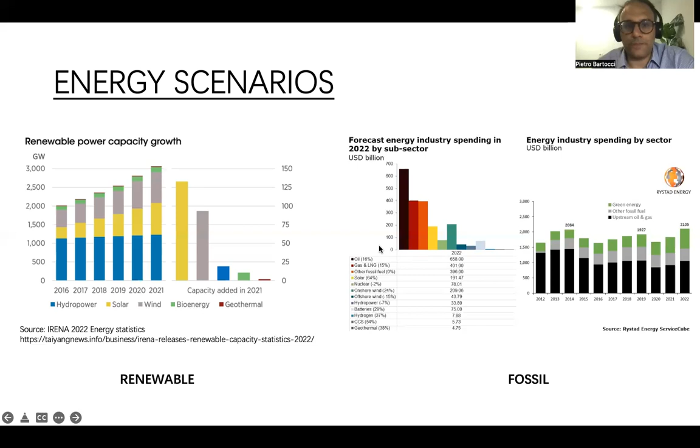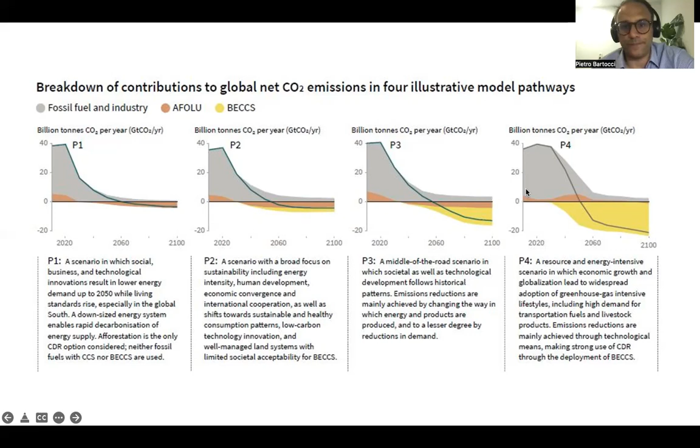So how does bioenergy with carbon capture and storage work? Mainly CO2 is absorbed from the atmosphere through the photosynthesis process, performed by biomass, which could be herbaceous or woody biomass. This biomass could be transformed into energy directly, or previously converted into a biofuel and then transformed into energy in power plants.

We are speaking about thermochemical power plants which combust biomass. The CO2 coming from this combustion, if it is captured and stored underground, could be a negative technology, carbon negative technology, because we actually absorb the CO2 and we store it underground.

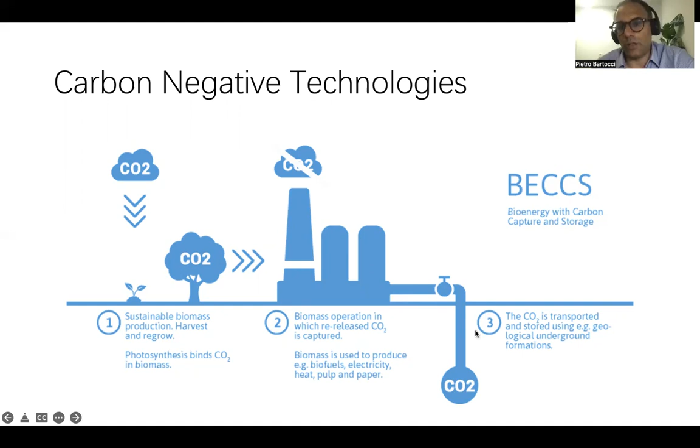My project, which deals with carbon negative emissions gas turbines, started through a previous collaboration between the University of Perugia and Baker Hughes. We see here the results of a paper published in 2021, a study on a new model of gas turbine developed by Baker Hughes in Florence.

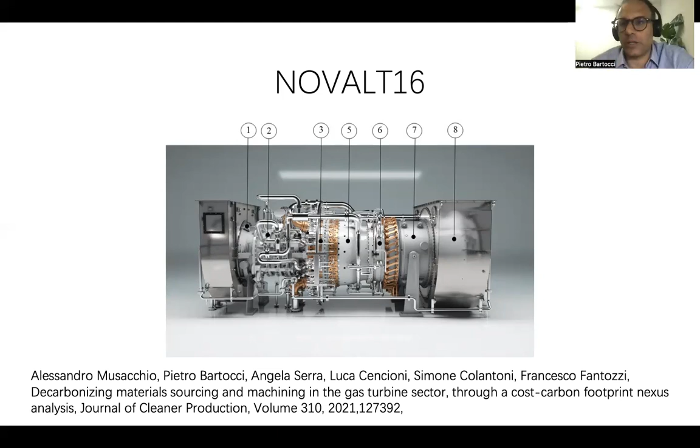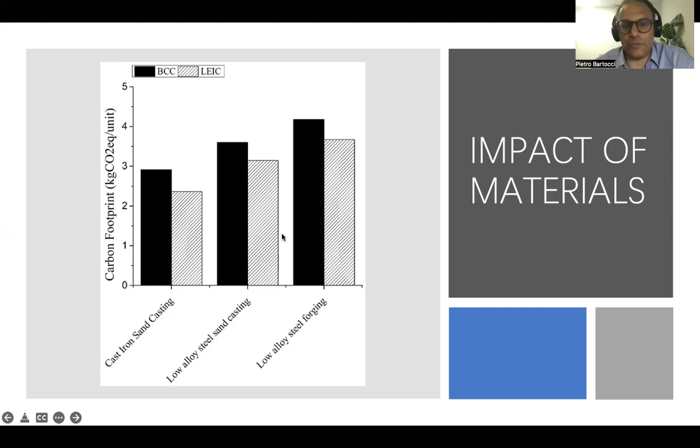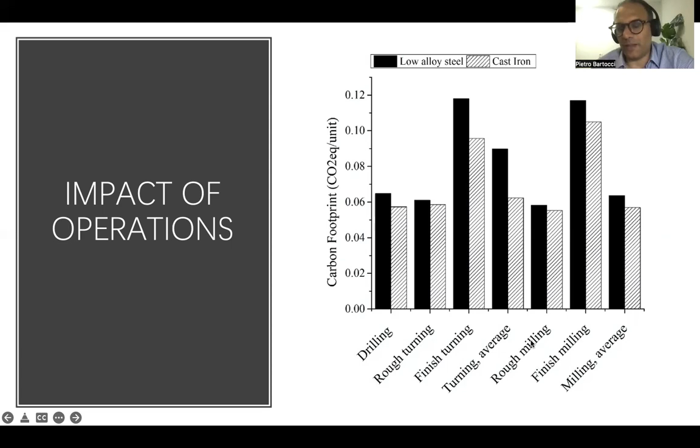We also evaluated, with the same approach mainly based on life cycle impact assessment, the impact of all the operations which are performed in the production company and are necessary to produce the gas turbine.

Finally, we arrived at the analysis of the different impacts of the different components of a gas turbine, in order to perform a design process which could take into account not only economic parameters, but also environmental and social parameters.

This action was preliminary to the project that I am presenting, because life cycle assessment can be a technology which allows us to select the less impactful solutions and approaches. This is followed by, but not yet fully utilized by, the whole oil and gas sector at the moment.

As we know, the most important part related to the impact of a gas turbine is when it combusts fossil fuels. So this is the part where we focus in the next steps of the presentation.

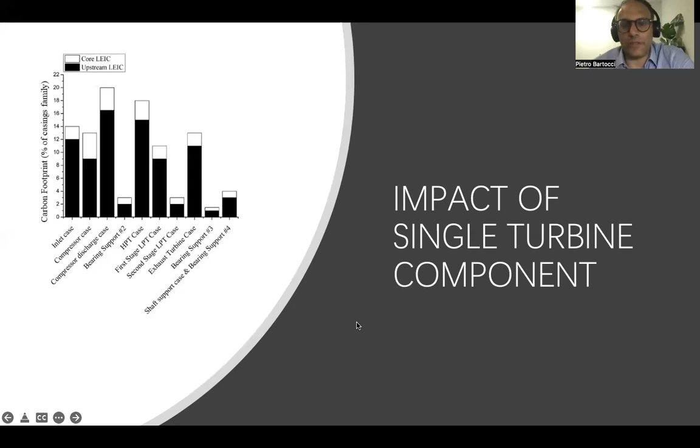So why integrate a chemical looping combustor into gas turbine? Economic and environmental aspects. This is a first study I did

This concept is not new. It has been discussed by the Technical University of Vienna, also by Dr. Wolf and Dr. Yan in a previous paper, and by the Polytechnic University of Milan.

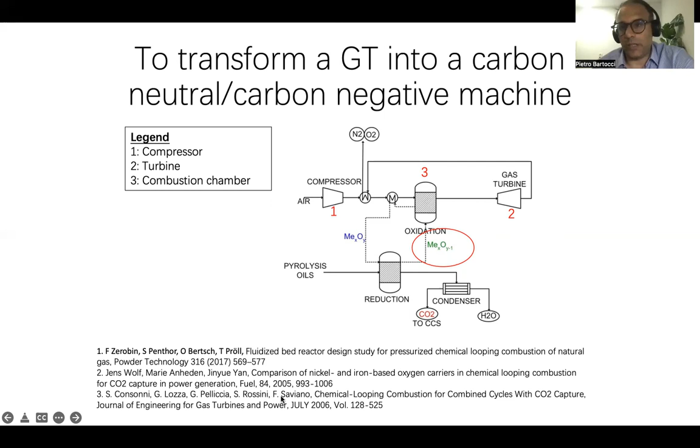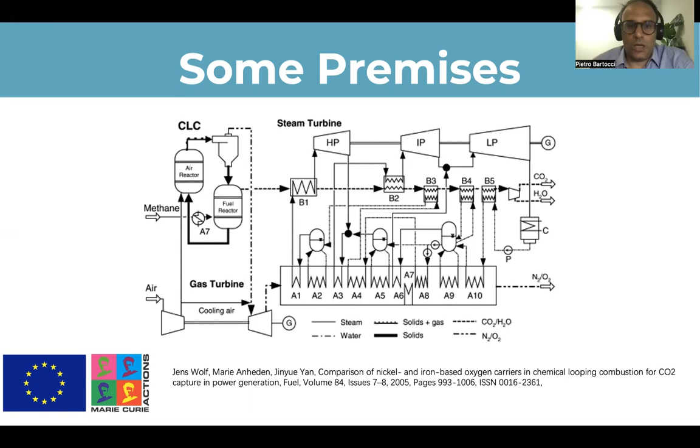Here is an example of the concept plant developed by Dr. Wolf and Dr. Yan. And here is also an example of the plant developed at MIT, which I found interesting to propose here because the conference is hosted at MIT itself.

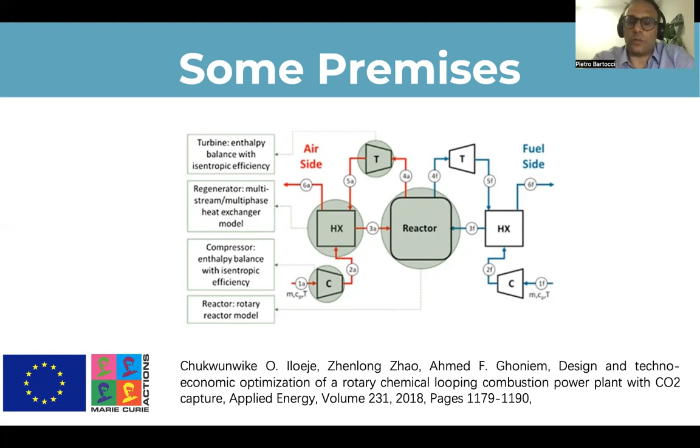And here we see that the peculiarity of this plant is that it's based on a combustor, which is a rotary combustor. So at MIT, they designed a very compact version of a chemical looping plant in which the reduction and oxidation can happen in only one reactor. So this was the importance of their approach.

Why is this work, this process, this project needed? It's needed because even though this process has been already studied and theorized, at least in theory, there are still some barriers which prevent its application at industrial scale, and so its commercialization. The first barriers are that we need efficient oxygen carriers, maybe bimetallic oxygen carriers.

We also have to grant low attrition of the oxygen carrier, and the oxygen carrier must not form dust, because this could be a problem when the dust is not efficiently separated by the cyclone and we find dust in the gas turbine, for example.

The kinetics of the chemical looping when applied at high pressure and high temperature is not well known at the moment. There are few plants, mainly on pilot scale, working with pressurized conditions, and this is a brand new field which needs to be addressed and researched.

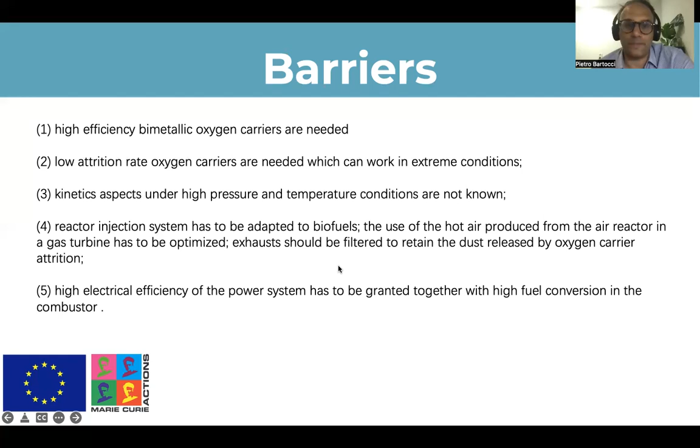So dealing with carbon capture through the chemical looping combustion process, I guess everyone knows the process: combustion where oxygen is provided by metal oxide, not by air.

The advantage is that in the exhaust gases, we don't have nitrogen, which is contained in air, and we don't have oxygen, because only the needed oxygen is liberated by the metal oxide. So we have two streams of water vapor and CO2, and if we condense the water vapor, we can have a pure stream of CO2 which can be captured at very low cost.

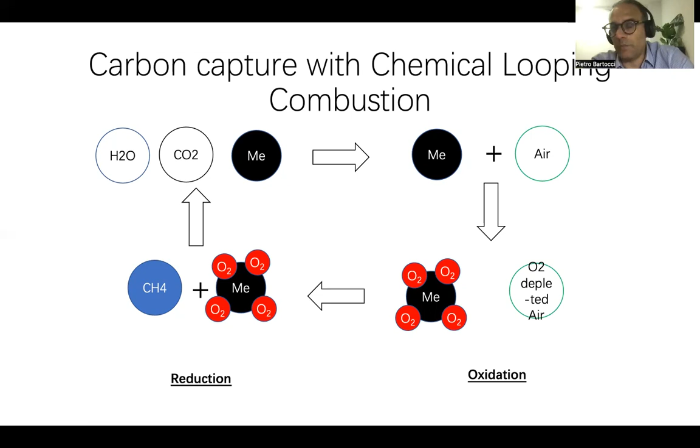We have done a feasibility study which wanted to create an energy scenario for Italy in 2030 and try to see what happens if we substitute the combustor of the combined cycles, which are now burning natural gas in Italy, with a chemical looping combustor.

The costs of the chemical looping combustors and everything are taken from literature. Obviously, this is a study which wants to promote this technology, but we also have to consider that the technology should still be optimized before joining the market and having wide application.

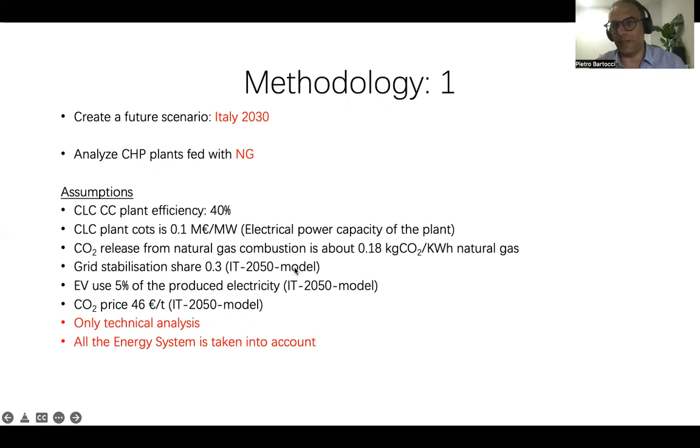The data about the Italian energy system are taken from the National Energy Strategy and the National Integrated Plan for Energy, using the Times Italy model, a version of the MARKAL-TIMES model used by the International Energy Agency to perform energy scenarios. All these data from different energy planning documents in Italy have been inserted into the EnergyPLAN software developed by Aalborg University in Denmark.

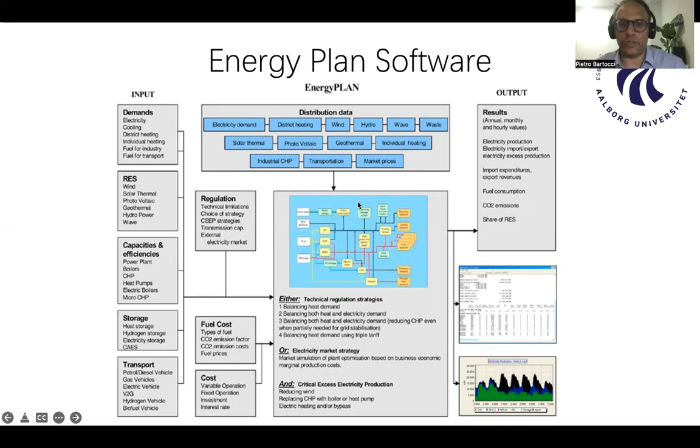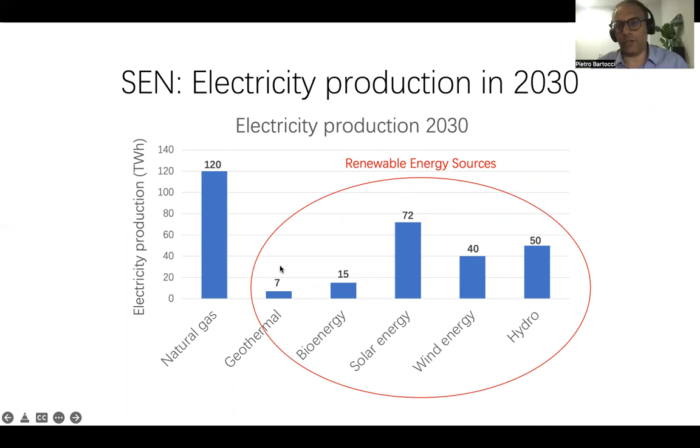We have recreated the energy scenario for Italy based on the targets indicated in the energy strategies for 2030. We see that the contribution of natural gas is still very important, and we assume that the natural gas combined cycle plants present in Italy will not be stranded assets, so they will continue to work and repay their investment.

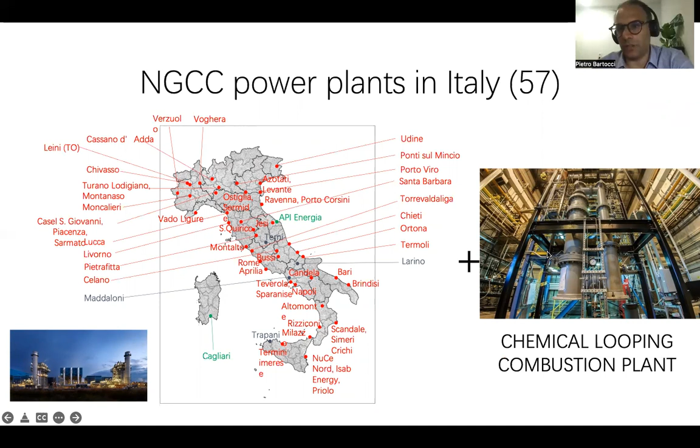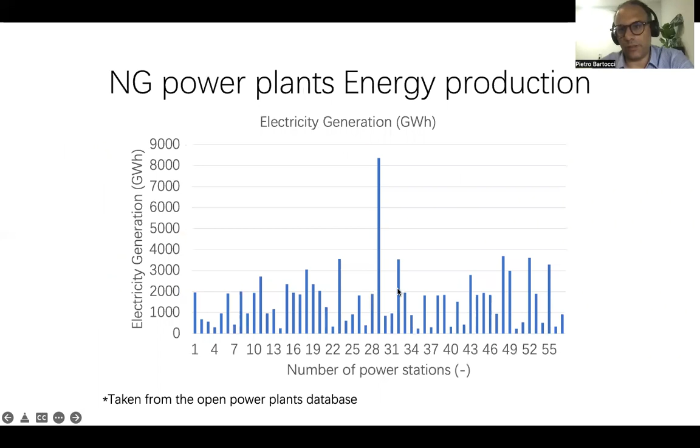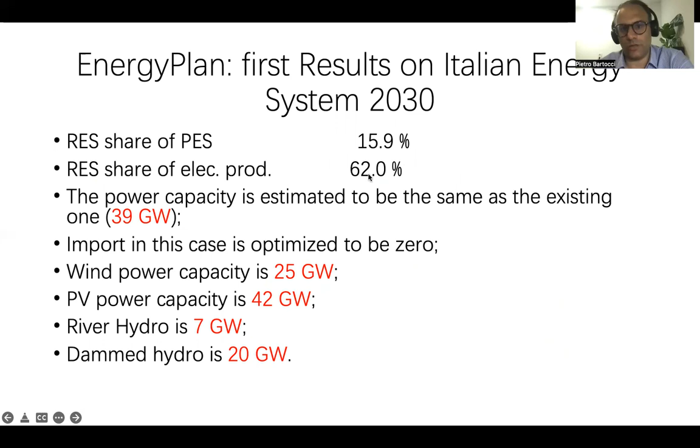What we want to do is substitute the combustion chamber with a chemical looping plant, which is the topic of my project. These are the capacities of the combined cycles we have in Italy, and this is the electricity production. We see that our final scenario introduces a penetration of renewable energy around 62%.

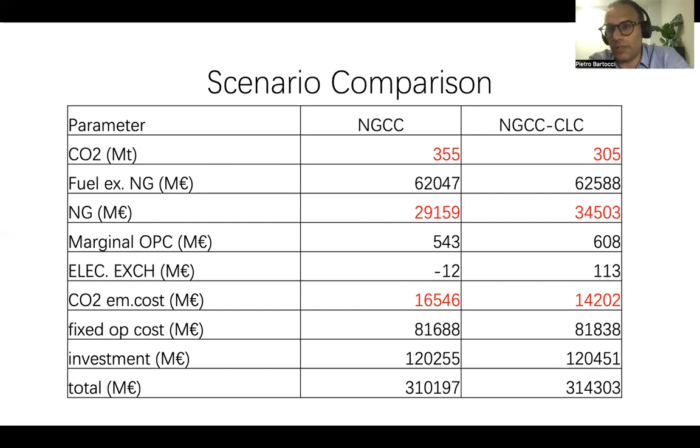We see here the benefits in terms of CO2 reduction and the costs of the total system. If we compare the costs of the new system, on the right, where we introduce chemical looping combustion, with the business as usual scenario proposed on the left, we see that the investment needed to upgrade the plants is not so huge.

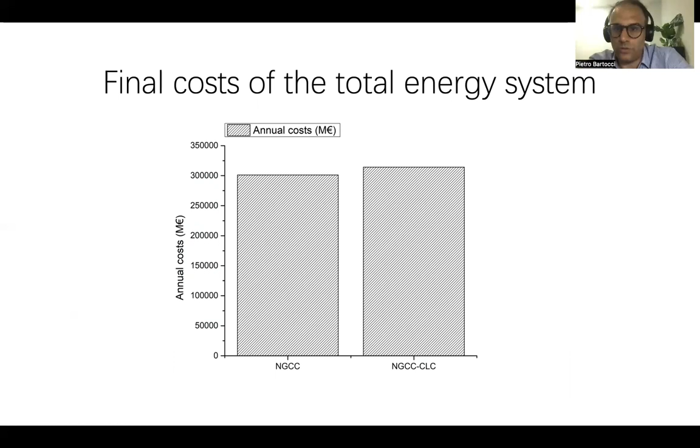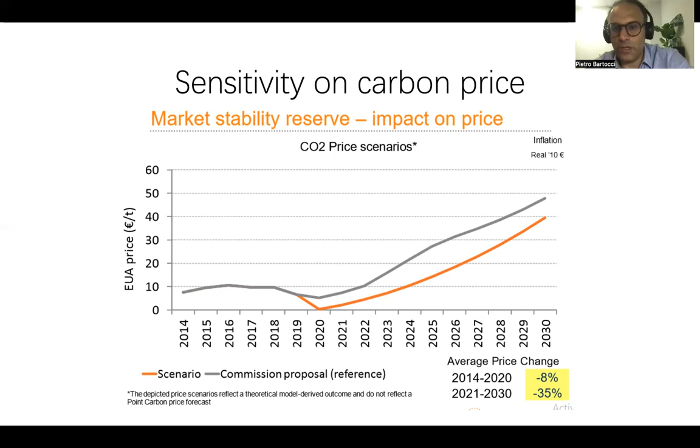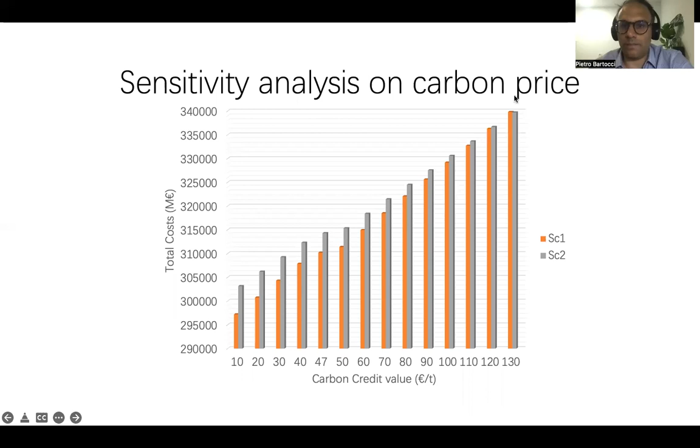The investment and operating costs also depend on the carbon credits that we have, and these carbon credits are much higher compared to the estimates we had in 2018. So if the carbon credit reaches a threshold of 130 euros per ton, we can say that all the investment and costs necessary to run this system could be balanced by the carbon credit, equaling the business as usual scenario.

So from these premises derives my project, which uses chemical looping combustion not only for CO2 capture, but also for carbon negative technologies. What we want to do is use biofuels in this technology.

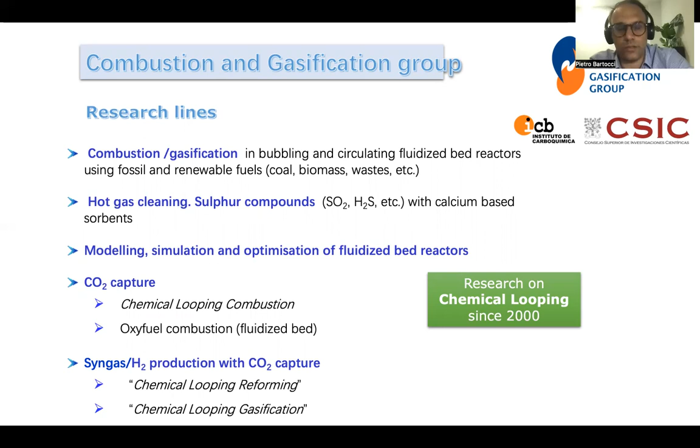To study how to develop such a combustor and this technology, I was hosted as a Marie Curie Fellow at the Instituto de Carboquímica in Zaragoza, Spain, by the group of combustion and gasification, which has several research lines, and facilities to prepare oxygen carriers, test them in pilot plants, and then scale and optimize the entire combustor.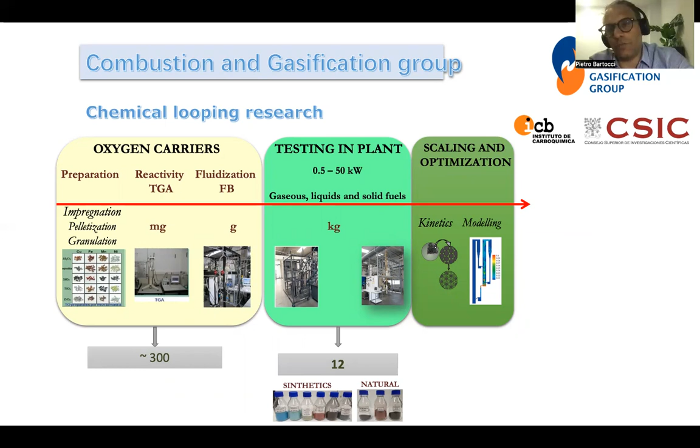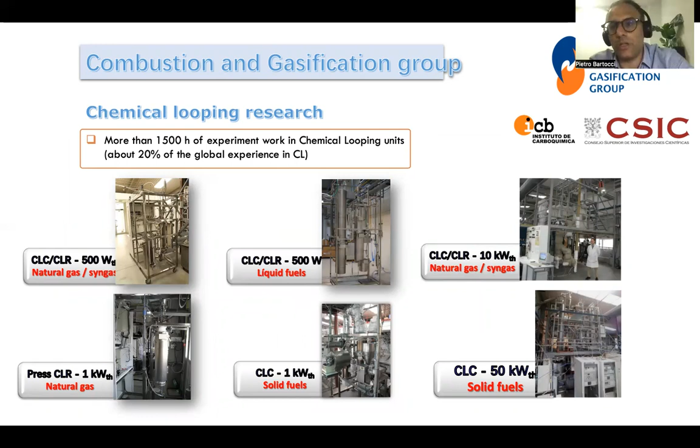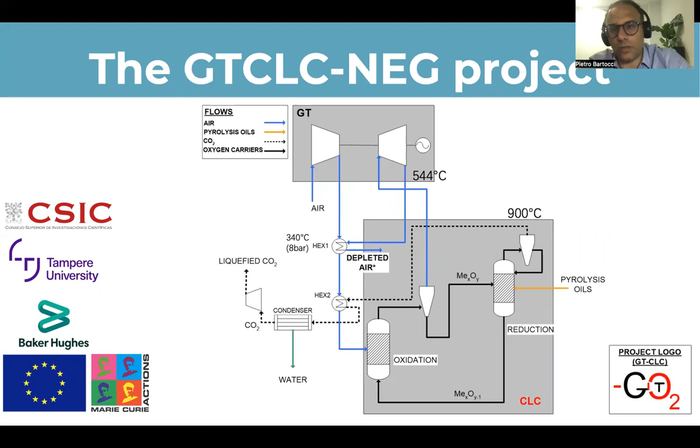Here are batch plants which can work with gaseous, solid, and liquid fuels, and also continuous plants. We have already discussed the idea of coupling chemical looping with the gas turbine, so I will not speak about it again.

I will introduce the project, which is mainly based on the preparation of oxygen carrier in batch tests, modeling of particle, reactor, and the whole plant, and then continuous pilot tests and reactor design, with guidelines to help build our first prototype, for example.

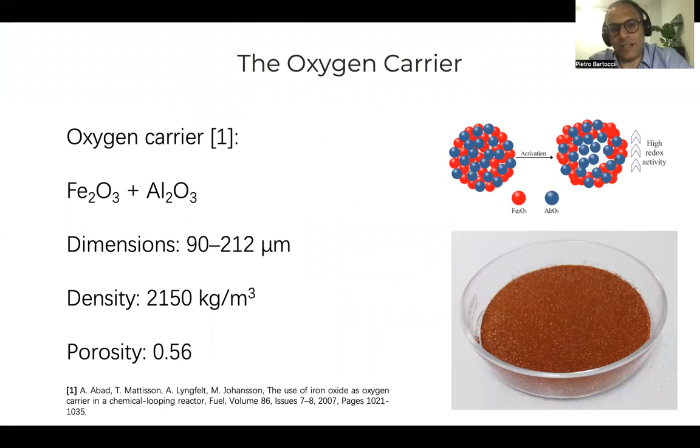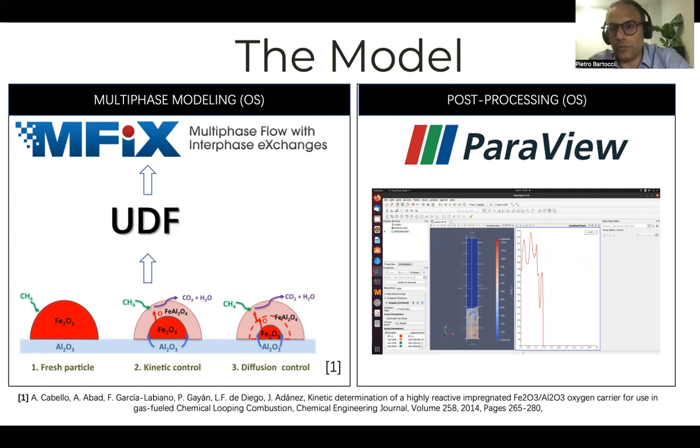These are the results of the modeling part, which have already been published. It's a model for a batch reactor, done in the MFIX software, developed by the National Energy Technology Laboratory, part of the DOE in the US. The results of the model are based on kinetics, with kinetic parameters derived at the institute where I'm working now in Spain, and then visualization of the results.

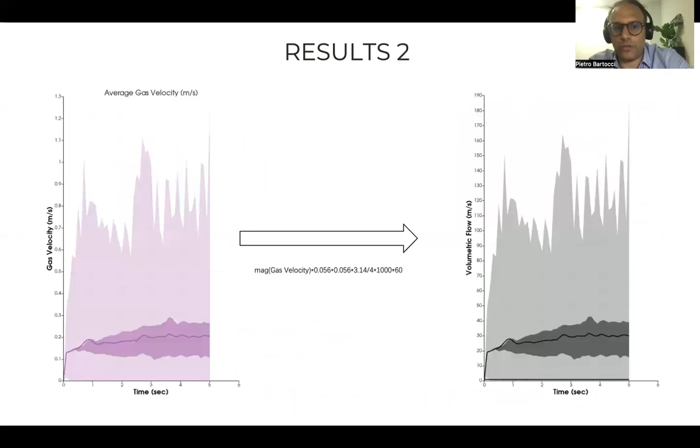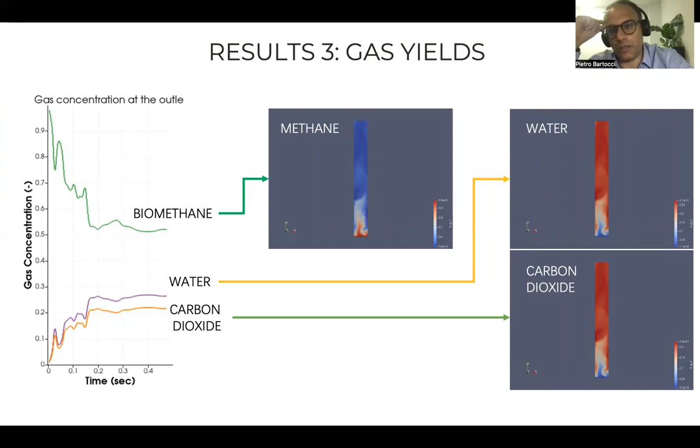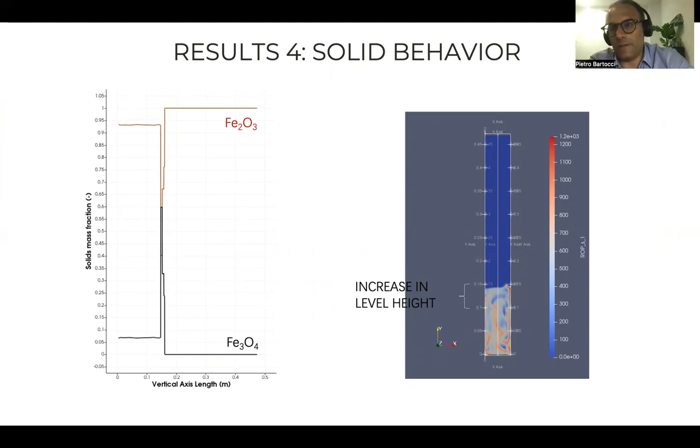These are the trends of pressure, velocity, and temperature, then gas velocity and volumetric flow. Also, the products of the reaction are obtained, and the conversion factor of the oxygen carrier, which is the main parameter we use to validate our results. An example of a result is provided here.

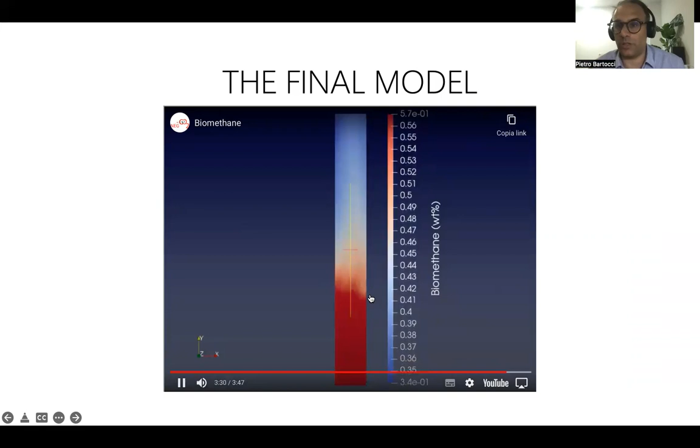We have a YouTube channel for the project, and this is a batch reactor like the one we use in Spain, working with biomethane. The interesting part is that around 3 minutes in, we see that the reaction path completely changes, so we are able to establish when the oxygen carrier is exhausted and terminates its efficacy, marking the maximum length of the complete reduction cycle.

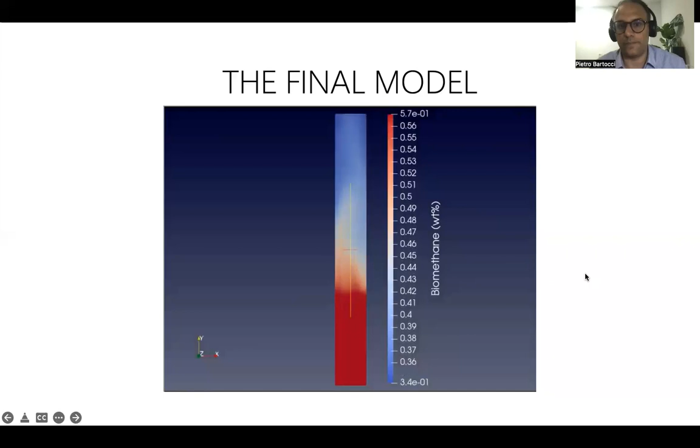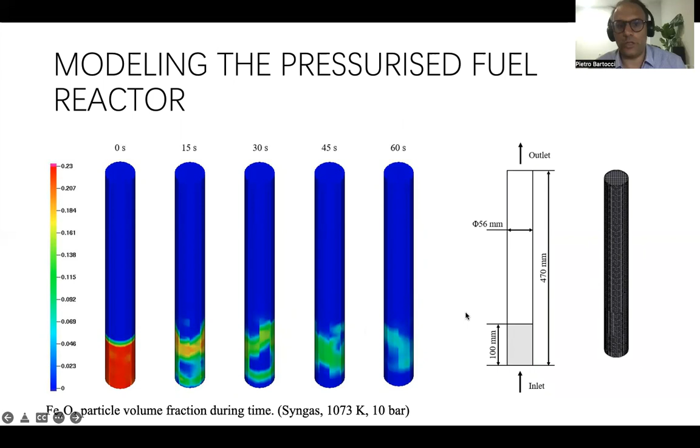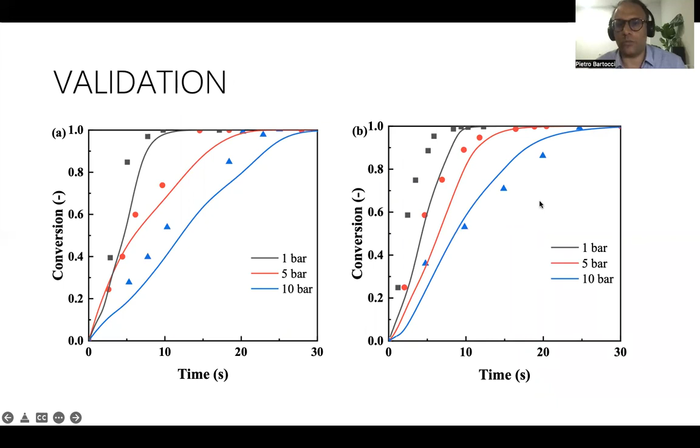Same modeling has been done in collaboration with the Huazhong University of Science and Technology. Here we see the batch reactors, which have been validated from pressurized TGA data, measured also during our project. And here we see the height of the reactor, and that the fuel, which in this case is syngas, decreases because it reacts with the oxygen carrier at different pressures.

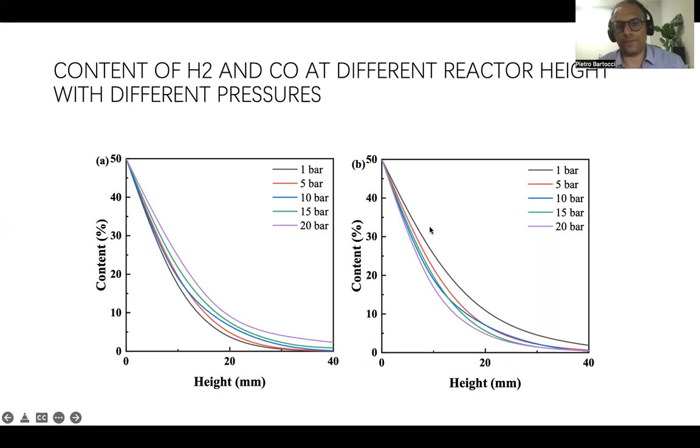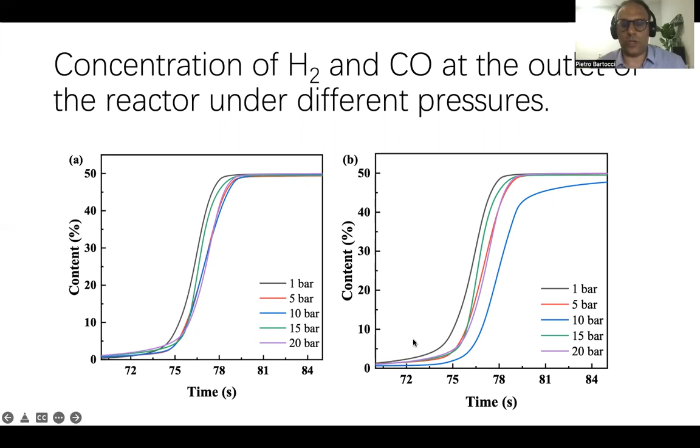H2 on the left and CO on the right. Here we see the behavior at different pressures, and also the length of the cycle, because here we see that the fuel does not react, then recovers from full concentration, and this means we use this data to evaluate the length of the total cycle.

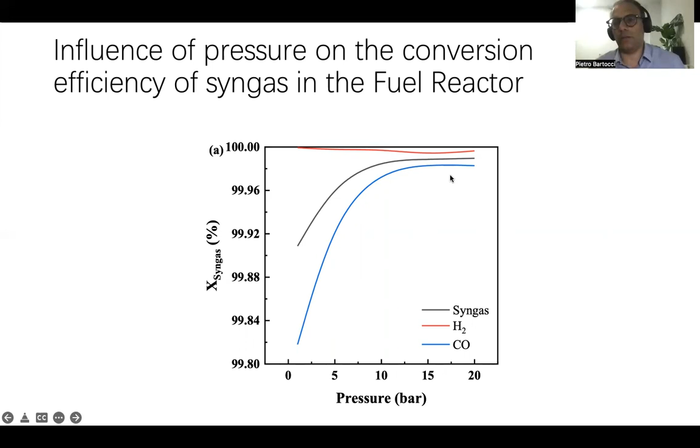Finally, we see the trend of reactivity of hydrogen and carbon monoxide at different pressures. We see that carbon monoxide is much more sensitive to pressure with respect to hydrogen, and that hydrogen has a slow reactivity at around 15 bars. We see also that the behavior of syngas can be modeled just by adding the behavior of carbon monoxide and hydrogen.

Through this data, we have calculated the inventory of the oxygen carrier, and we found a result which was not predicted by the experiments done with the pressurized TGA. With the pressurized TGA, we saw that the reactivity had an opposite trend, meaning that with the increase of pressure, the reactivity was decreasing.

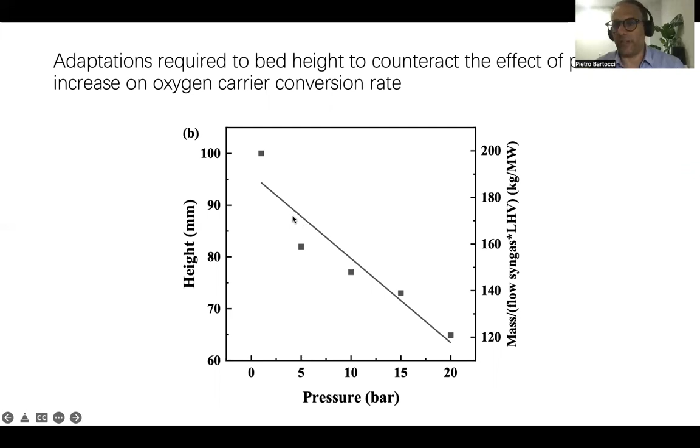In this case, we see that the reactivity increases with the pressure, and this means probably that the pressure improves the heat exchange and the mass transfer inside the reactor. The reactivity has kinetic parameters and heat transfer and mass transfer parameters. So when we test the oxygen carrier in a reactor, the heat transfer and mass transfer can balance or overcome the effect of the kinetics.

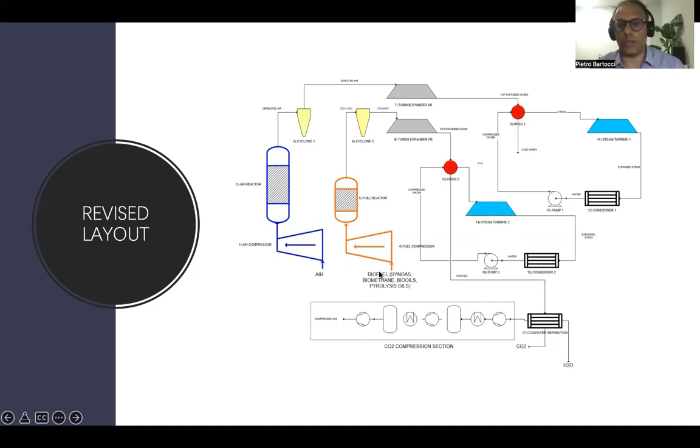The same plant, based on the CFD model and on the experimental models, has been developed through Aspen modeling, and we have produced guidelines to develop such carbon negative combustors for gas turbines.

The guidelines say that we start with the power of the gas turbine, then we calculate the air mass flow, then we calculate based on a stoichiometric combustion formula the fuel mass flow, and so the oxygen carrier circulation rate and the inventory, and we arrive at the final design of the two reactors, the air reactor and the fuel reactor.

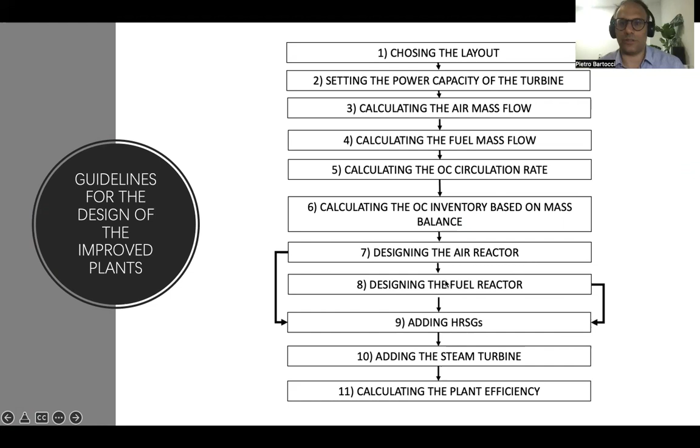This has been done already in Aspen, and we have also made an optimization strategy for the combustor to maximize the efficiency of the plant.

To maximize the efficiency of the plant, much of our study was done on the excess air used in the air reactor. This can be 1.2 up to 3 times, or 3.7 even in some publications. So what we saw in our calculation is that the higher the excess air to fuel ratio, the higher the efficiency of the plant.

This is based on two advantages. The first is that if we have more air, we can control better the temperature in the air reactor. The second advantage is that if we have more air, we will have more power, because this will expand in the gas turbine, and we will produce more power with less fuel. So the efficiency will be high.

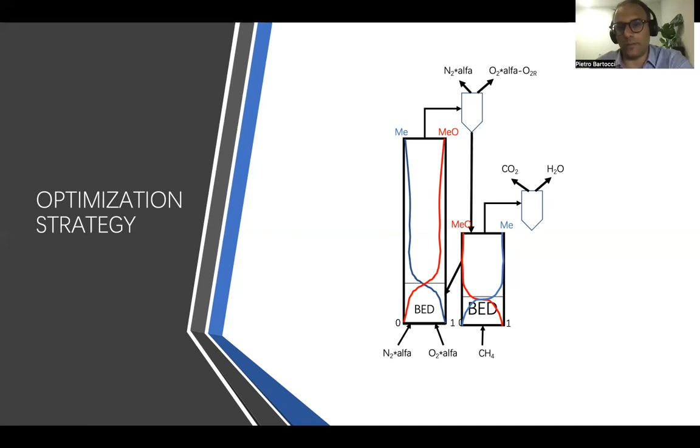How to maximize the excess air to fuel ratio? We have done two thermal balances, of the air reactor and the fuel reactor. These are connected, so in most cases the heat is given from the oxygen carrier, which is transported from the air reactor to the fuel reactor.

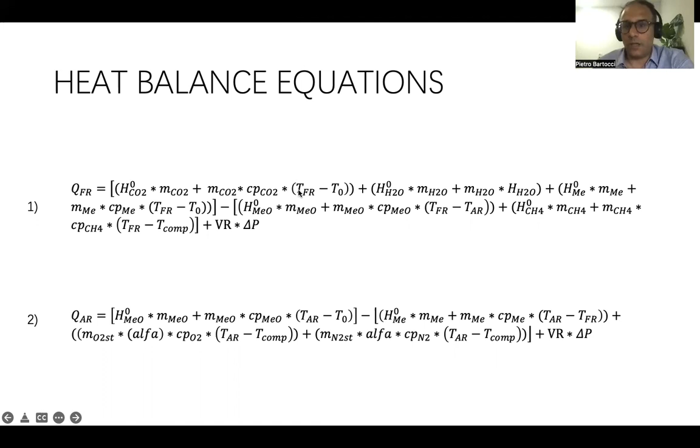So if the heat is transported, we can say that the two terms of the two equations are equal, because they establish an equilibrium between the two connected reactors. So we have only one variable to optimize, and this is the excess air used at the air reactor, according to our study.

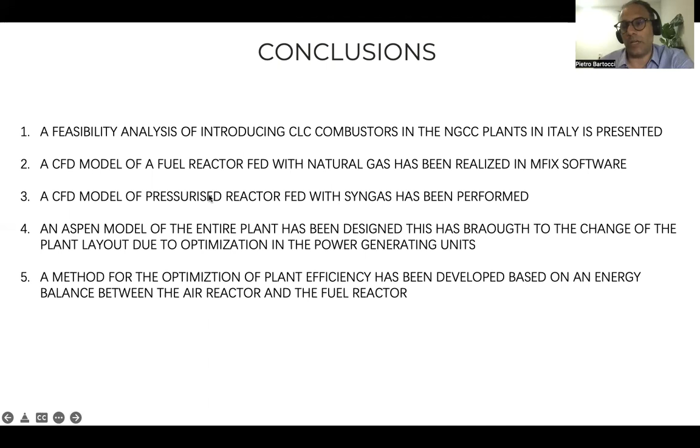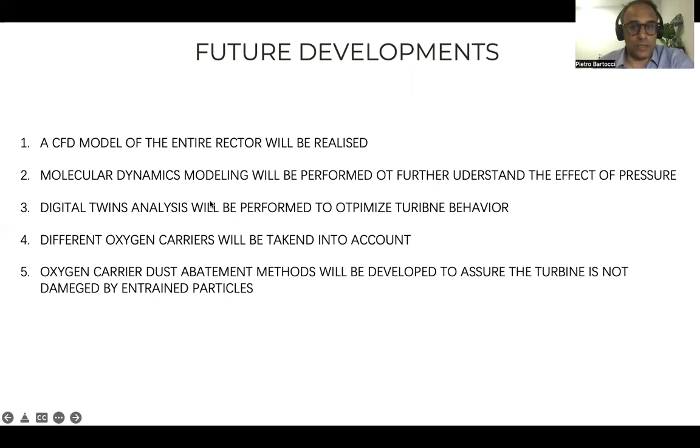Future developments are surely based on economic analysis, because this is also to be taken into account.